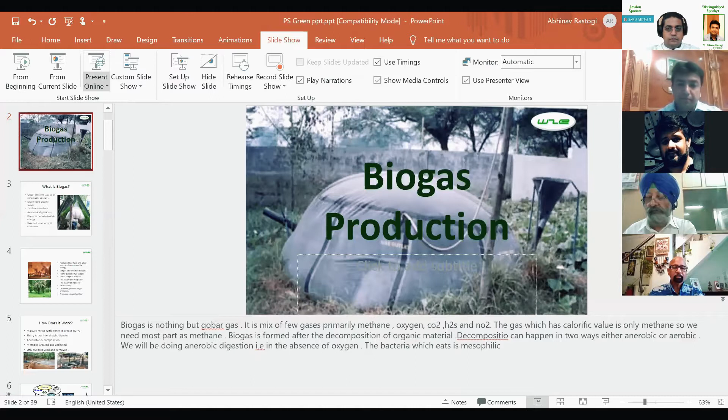First of all, I would like to tell you what exactly biogas is. Biogas is nothing but gobar gas, what we have heard earlier. We have seen in villages people use cow dung to make gas out of it and use it as fuel. So we will be doing this entire process in a much more commercial manner, and we'll be enriching the biogas so that we can make CNG out of it, and the biofertilizer out of it.

So biogas is nothing but a mixture of a few combustible gases like methane and oxygen, and it has a few inert gases like carbon dioxide and H2S, which are the unwanted gases. So we have to enrich the biogas to make it fit for industrial and vehicle use. There are two ways of decomposing organic waste: in the presence of oxygen, or in the absence of oxygen. We'll be primarily discussing the absence of oxygen, that is anaerobic digestion. The bacteria involved in this digestion are called mesophilic bacteria. This is a little technical, so let's discuss it later.

First of all, we'll discuss about the biogas production. Then after that, we'll discuss about the purification and the enrichment for industrial and vehicle use, so that we can use it as CNG for our vehicles.

What exactly is biogas? Biogas is nothing but when organic material decomposes. When it gets decomposed, it gives us a gas. Bacteria actually eat up the surface of the organic material and start burping, and that burp is nothing but the biogas which comes out of it. It itself is an exothermic reaction, and it is a clean, efficient source of renewable energy.

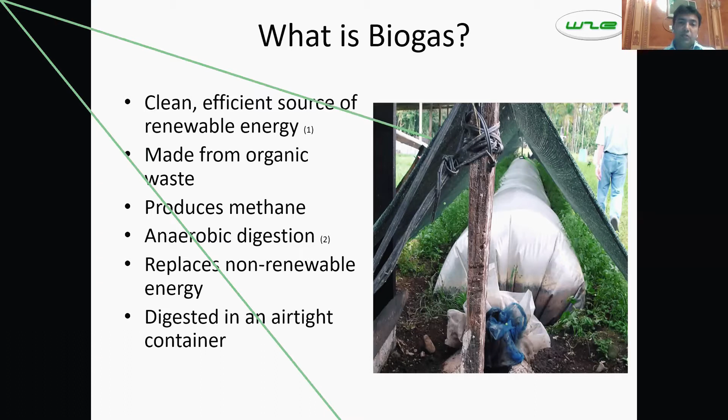Biogas replaces all the non-renewable energy resources like diesel and petrol. It is equally good as diesel, petrol, coal, or any other resource. As I told you earlier, the digestion has to be done in an airtight container. It replaces fossil fuels and other sources of non-renewable energy.

We have to move away from diesels, petrols, and coal so that we can have less emission of greenhouse gases. The greenhouse gas emissions when we burn CNG are far less compared to burning petrol, diesel, or LPG. It is simple and the cleanest gas available right now.

Carbon monoxide emission is given as only 0.09 grams per kg, which is really less. So it doesn't add up to greenhouse gases at all, and it is highly available in the core of the Earth as a natural gas. We have so much waste available around ourselves that we can collect it and make it into an energy resource.

Another byproduct we get out of this is biofertilizer. When these organic products are digested, there is a residue left which gives you purely organic manure, which helps enrich your soils, gives a better yield, cleaner vegetables, healthier soil, and doesn't let any pollution take place.

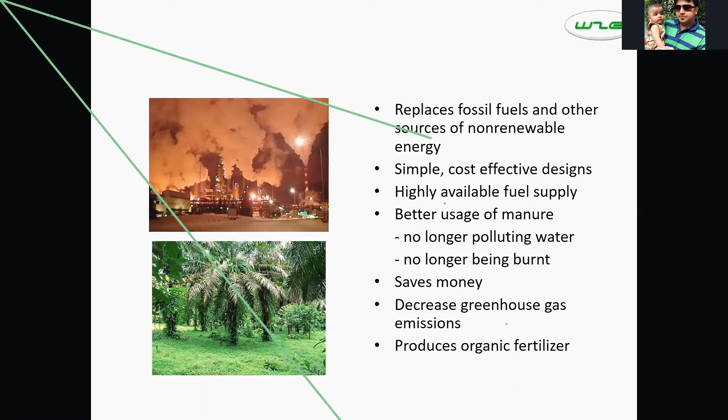We feed the feedstock, that is the organic material, into a feeding pit, and there are agitators in it. Those agitators will churn it and make it into a slurry mixed with water, and that is pushed into the airtight digesters, so that anaerobic decomposition of the material can take place inside. Inside the digesters there are already built up colonies of bacteria, the mesophilic bacteria, which help in the decomposition of those organic products.

Every organic product has a certain time for its decomposition, called hydraulic retention time, HRT. In our case, we'll be using press mud primarily, and cow dung as the organic feedstock. The HRT is around 40 days, so whatever goes in on the first day can be fully digested by the bacteria by the 40th day.

We have to design our digesters so that this process works well and we get maximum methane, maximum biogas out of it. We have to take care of a few important aspects. The pH value of the slurry going inside the digester has to be kept around 7, purely neutral. It may vary from 6.8 to 7.2, but it has to be kept in that range so it's the healthiest food for the bacteria inside.

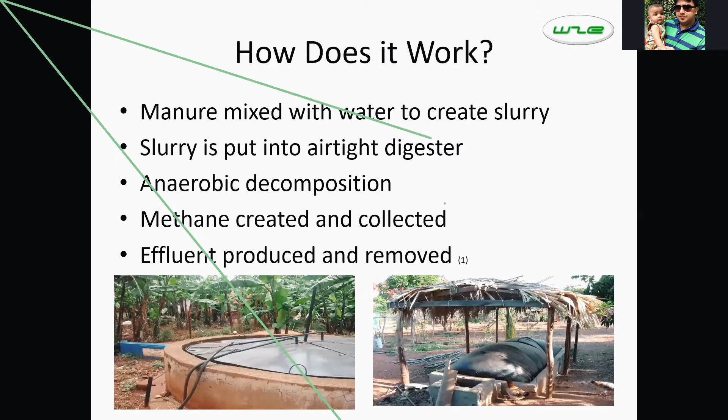So this is how the thing works. First, we put all the water, excreta, and slurry inside the digester, and anything biodegradable can be put inside a digester. It has a certain retention time, and we need to calculate how much time it takes to get digested.

Then comes the anaerobic environment, meaning the digester itself. It is covered from the top, a concrete cylinder basically, covered from the top, with a non-permeable membrane so that the gas collected at the top can be taken out through a pump or an exhaust.

The processes that take place in the anaerobic environment are hydrolysis - I won't go into detail, it's just the fragmentation of the organic material into smaller parts. Then fermentation takes place, then acetogenesis, dehydrogenization, and methanogenesis. Methanogenesis is the last part, in which methane is evolved from the bacteria.

Whatever the bacteria eats up, when it burps, the methane gets collected at the top of the chamber, and you have to keep churning the manure inside the digester so there is no scum formation on top. If there is scum formation, the bacteria won't be healthy and won't be able to eat properly, so it won't give you as much biogas. These considerations have to be taken care of.

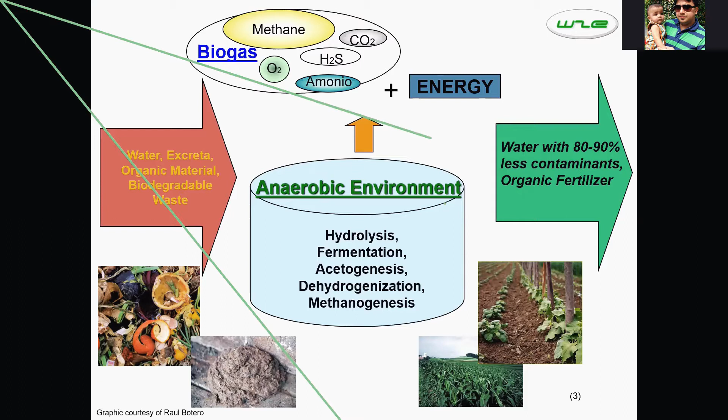The water which comes out of the slurry from the digester has 80 to 90% less pathogens in it, no harmful bacteria. These bacteria, whenever they come into the presence of oxygen, eventually die. So this has 80 to 90% less contaminants, and it is purely an organic fertilizer. So these are the technical requirements for a biodigester.

What exactly do we have to take care of? As I told you earlier, the pH value has to be maintained between 6.8 to 7.2 so that it is a healthier environment for the bacteria to survive, and so the bacteria can work more efficiently.

The temperature is also important, as these bacteria rely on a certain temperature. They are most active in a range of 35 to 38 degrees. So we have to maintain a temperature of 35 to 38 degrees inside the digester, and we do it by having coils inside, since it itself is an exothermic reaction. So the temperature is maintained a bit more, and we keep it insulated from the outside as well.

I told you about the time which has to be taken care of — that is nothing but the hydraulic retention time. Hydraulic retention time is the time needed for a material to get decomposed.

The waste to water ratio also has to be maintained — a certain amount of waste has to be mixed. The slurry cannot have a total solids (TS) of around 70%, making it too solid inside, so the bacteria can't eat it. So the TS has to be maintained at around 15 to 17% inside the digester when mixing the waste with water.

The manure, the slurry which comes out of the digester, is nothing but an organic fertilizer. So the organic fertilizer has a very good carbon to nitrogen ratio component. Your feeding stock should be such that it is neither too carbon rich nor too nitrogen rich — the carbon to nitrogen ratio has to be maintained.

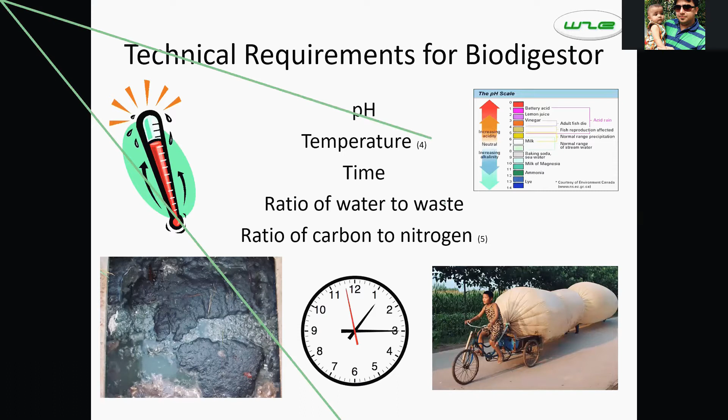Different products, when eaten by bacteria, give a different amount of biogas. The things eaten by the bacteria are nothing but biomass. So let's say if cow dung gives us around 100% of the gas, then food processing waste gives around 6 to 9 times higher biogas generated from the same amount of waste as cow dung.

But these wastes are not easily available for economic viability, so this has to be taken care of. We have to use wastes which are easily available in nature and abundantly available in nearby areas, so you can make some economics out of it.

We won't get too much food waste — I mean, we won't get tons of food waste daily unless we start collecting from all resources, which may not be economically or commercially viable.

But viable things are like collection of poultry waste, which is available on a daily basis, from the Gaushala waste or from the sugar industry, which runs probably like 7 months in a year. These wastes are abundantly available and have to be taken care of, as they make too much landfill. So this biomass should be considered appropriately so we can get a decent amount of biogas out of it.

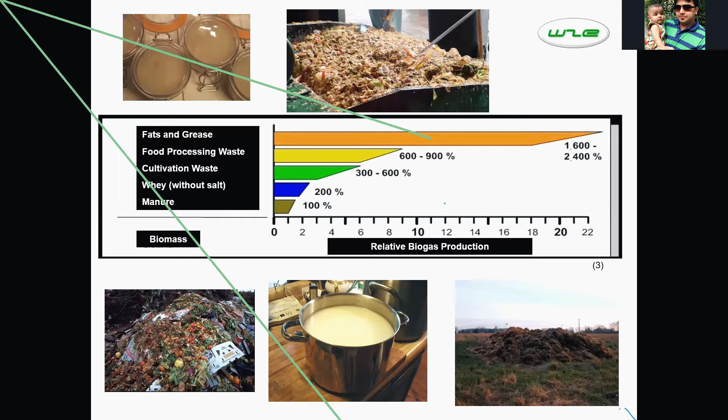Now we were talking about the effluent. The effluent which comes out of the digester is nothing but organic fertilizer — it is almost pathogen free, no harmful bacteria, no unwanted material in it. We can separate this effluent, the solid and liquid, in 3-4 ways, like sedimentation. But sedimentation is a process which can only take place for a smaller quantity of liquid.

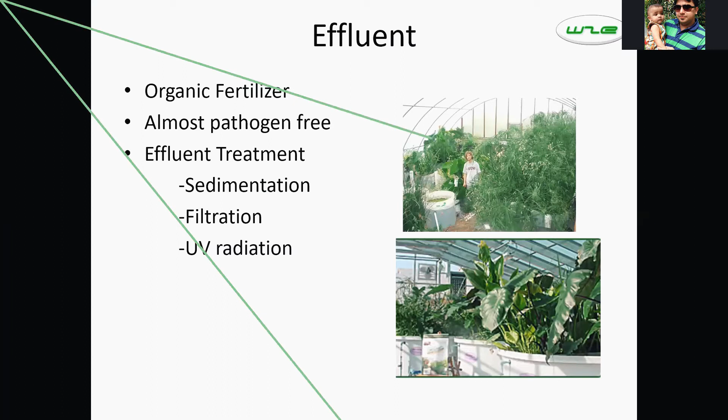If you talk about a lakh liters of liquid, the sedimentation is going to take too much time, and the amount of water collected daily will be too much. The filtration, but the other thing is passing it through the solid liquid separator, which we haven't mentioned here.

So now, is the biogas model successful? This is one of the first of its kind in the entire UP, and it got awarded by Mr. Yogi Adityanath last year. I've given a couple of presentations at the MNRE also, which is the Ministry of New and Renewable Energy Resources, and this project actually got approved from UP NEDA also. I gave a couple of presentations at UP NEDA as well. UP NEDA is nothing but a department of Uttar Pradesh which deals with additional resources of energy.

And this entire program comes under the SATAT scheme, run by the central government. SATAT is nothing but Sustainable Alternative Towards Affordable Transportation, which means because of the depleting nature of fossil fuel, we can have renewable energy instead. That is why the SATAT scheme came into play, starting around 2018.

So is this a successful model? See, gobar gas is nothing very new to the Indian industry. It's just that we haven't commercialized it properly. But this is a very popular industry in Germany and Sweden. It's been 25 years since it's been there, and they've been running trains on it, running all their trains, cars, and so many industries have been using CNG to run these things. So the Middle East has also been quite successful in doing all this.

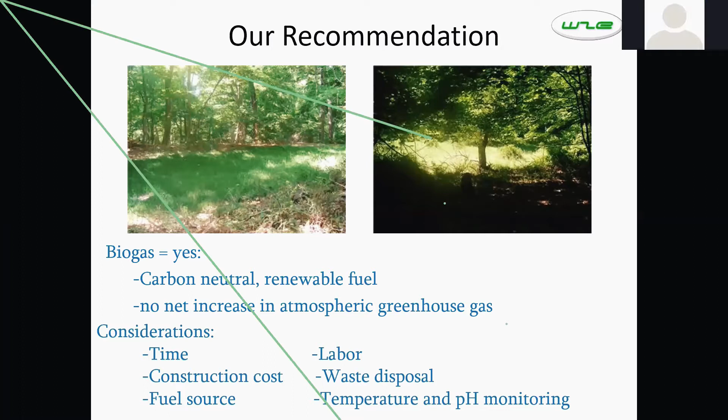Now we talk about the biogas enrichment process. Biogas is nothing but 55 to 75% methane, and the rest is CO2. There are traces of water vapor, traces of H2S. These things have to be eliminated before we can use it for vehicular and industrial uses, so that we can increase the calorific value, so you can run all your DGs, generator sets, boilers, cars, and other equipment which require a high calorific value. So we need to purify this biogas to get a better, methane-rich gas out of it.

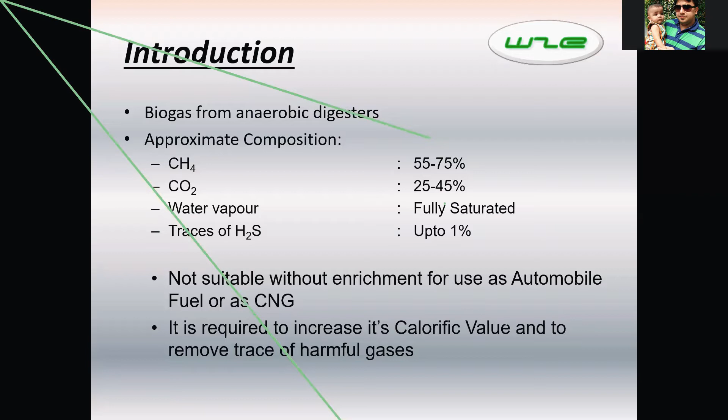So there are a few things to consider: how much a gas heater needs, how much a vehicle needs, how much a gas grid needs. We can give this gas to the gas grid also, or use it to run generator sets before purification is started. Before purification, the calorific value of biogas is around 20,000 kilojoules, and after purification is done, it becomes 50,000 kilojoules. So we need to enrich the biogas so we can have a better calorific value fuel out of it.

The purification is done through a few processes: absorption, that is scrubbing. In scrubbing, we use too much water, so there is too much water wastage. This is economical and very feasible, but the water is contaminated because H2S gets absorbed in it. So to dispose of that lakh liter, probably 2.5 lakh liters of water daily, if you use this method, it's going to be a troublesome problem.

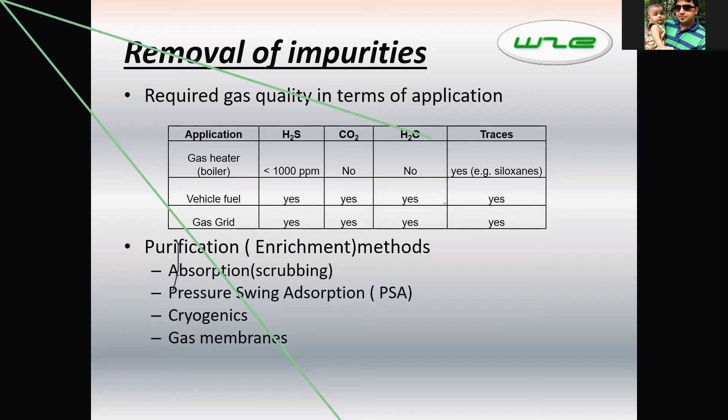The most commercially viable process is pressure swing adsorption, the PSA technique, which is nothing new, it's been around for ages. Cryogenics and gas membranes are other methods to remove impurities. But we use PSA because it's the most economical and the least harmful, and it doesn't lead to any kind of pollution.

First, we remove carbon dioxide, which is an inert gas and doesn't help in burning, so we can increase the calorific value of the gas. When you're burning a gas, it has to be consistent in nature. There are standards in the market, like for biogas or CNG, the methane content has to be around 96%, 2 to 3% could be carbon dioxide, and 1% traces could be oxygen, nitrogen, or water vapor.

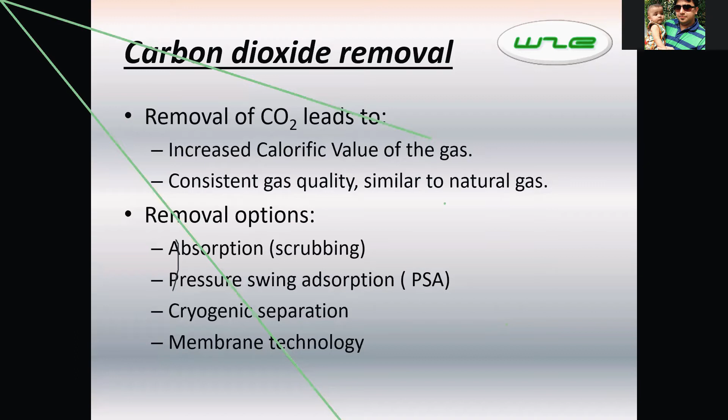This carbon dioxide can also be removed by pressure swing adsorption. As I told you earlier, water scrubbing technology passes the entire gas through a water chamber, which has to be changed again and again because at a certain pressure it absorbs the H2S and CO2, which become dissolved in water. So the disposal of that water becomes a problem, which is why we don't use this technique much. Also, the pressure, temperature, and pH of the water get disturbed, becoming more acidic because of the H2S involved.

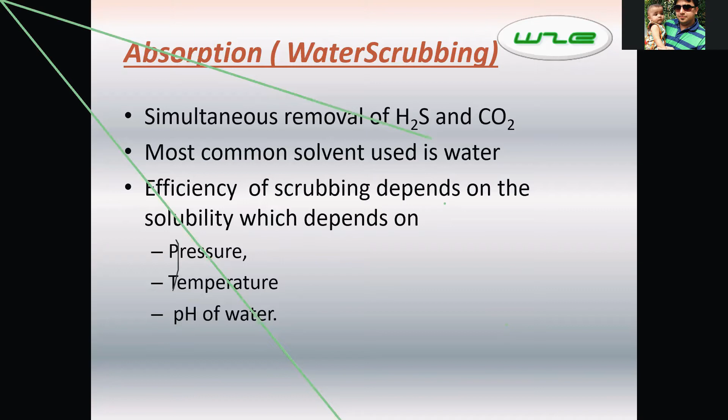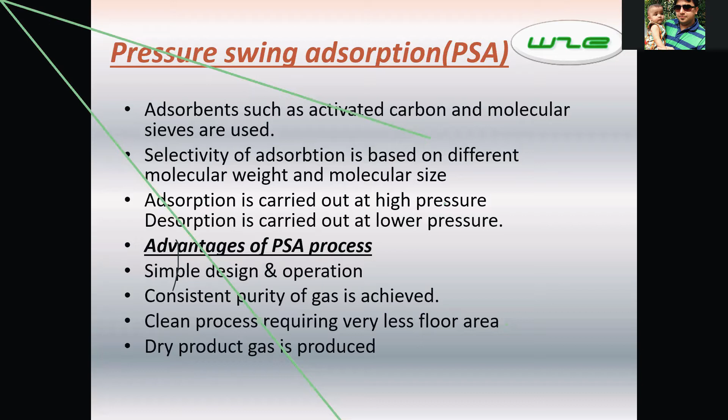Pressure swing adsorption is the process of adsorption and desorption carried out at higher and lower pressure. There are just two chambers: one where adsorption takes place, and one where desorption takes place. I won't go into detail, but these are simple designs to operate. I'll show in the next slides how exactly they look.

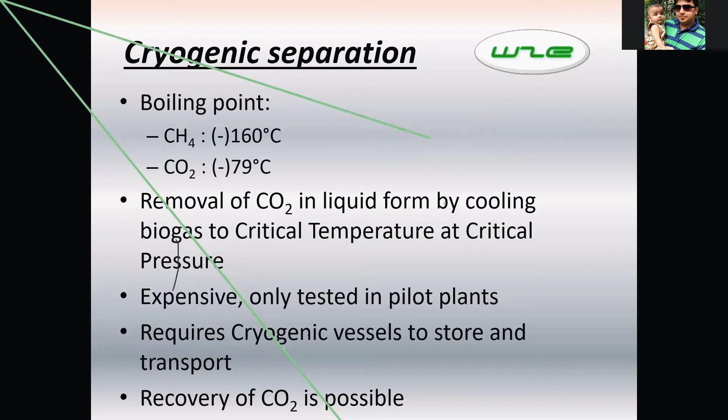We are not using cryogenic separation, so we won't get into it much. It's another process of removing CO2 by cooling the biogas, but the cooling itself takes too much energy, which is why we don't use cryogenic separation.

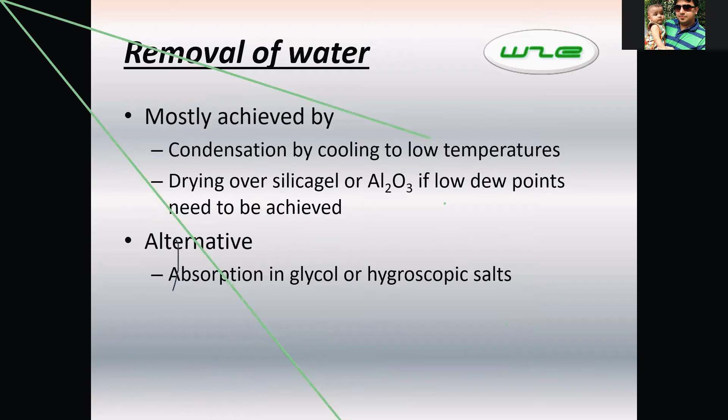It has to remove traces of water when the gases pass through the aluminum oxide, leaving behind all traces of water vapor, which is then removed.

The removal of H2S is very important. When the gases pass through activated carbon, it absorbs all the H2S involved. But there are still a few traces of H2S left after this process, so we remove those remaining traces in the next purification section.

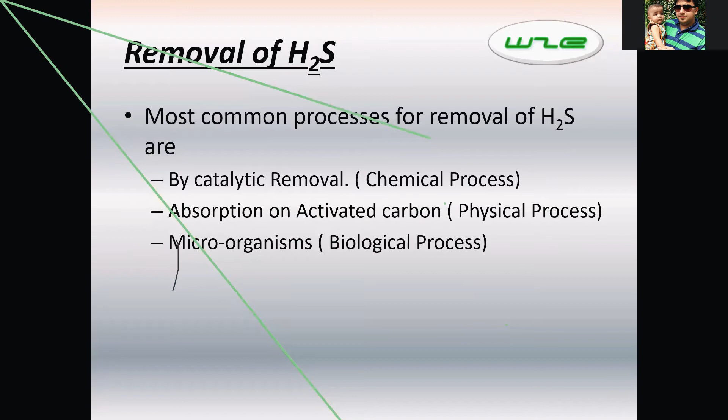This is nothing but adsorption through molecular sieves. Molecular sieves are small crystals with holes in them. When gases pass through, CO2, nitrogen, H2S, and water molecules get trapped, since the sieve sizes correspond to the molecular sizes of carbon dioxide, nitrogen, and H2S. This is a bit technical.

This adsorption and desorption process generally takes place under depressurizing conditions—one with pressure and one without. The PSA systems produce purified, methane-enriched gas continuously by repeating this adsorption and regeneration process.

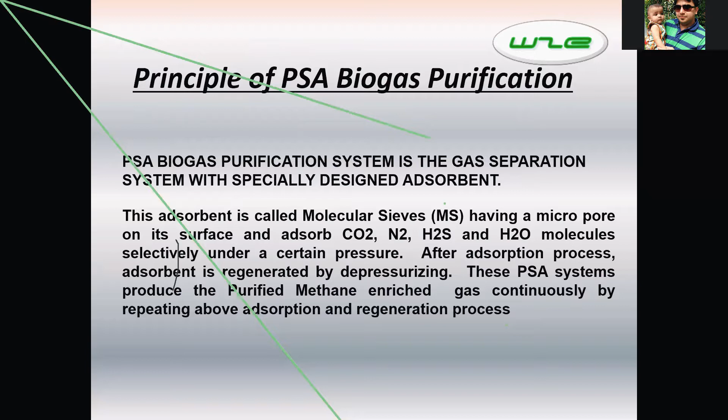This is how a PSA system, the purification system, looks like. On the left, the biogas goes in.

The coarse removal of H2S: as the gases pass through the activated carbon, 90% of the H2S is removed before it enters the chambers of the PSA system.

After the pressure swing adsorption is done, we get CO2 on one end. We can actually trap the CO2 also for making carbonated drinks, but we generally don't do that. We'll be flaring the carbon dioxide into the air and just collecting the methane out of it.

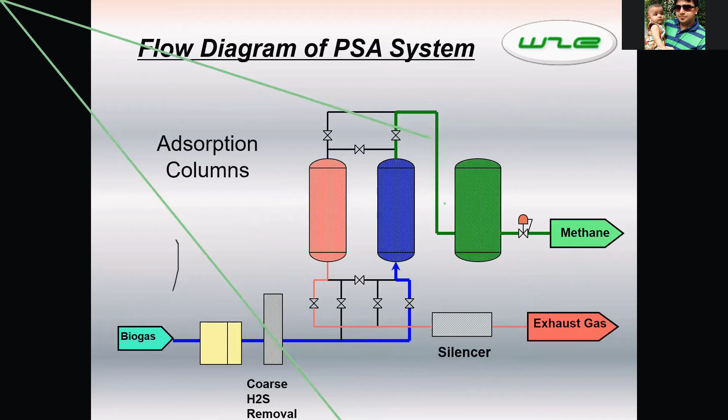The difference between LPG and CNG is primarily that LPG can only be compressed to a pressure of around 7.5 bar, which is not much, so you cannot transport the gas to a longer distance. The first advantage of CNG over LPG is it can be transported to longer distances because you can compress it to around 250 bars, and it is lighter than air.

CNG is lighter than air, so whenever there is a leakage, it can flare up into the air and the explosion risk is bare minimum. But LPG is heavier than air, it's denser, it settles at the bottom of the surface, so in case of an explosion, it's a big boom.

So these are a few advantages of CNG over LPG: first is the distance it can travel, because you can compress it to be transported over large distances, and it is lighter than air.

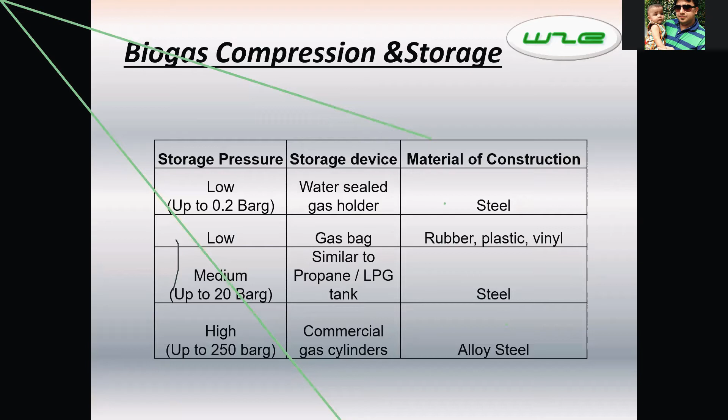At the last part of the slide, you can see you can compress the CNG at around 250 bar and it can be stored. You would have seen those cylinders at the CNG station kept at the rooftop - those are the cylinders where the CNG is actually filled up.

The biogas is purified and used for various applications, replacing fossil fuels including vehicular fuels. As discussed earlier, purification is required for transportation, storage, and vehicular use. When you compress a gas to 250 bar, the volume decreases by 250 times, so you can store it in a cylinder and carry it to a longer distance, making it more commercially viable for transport.

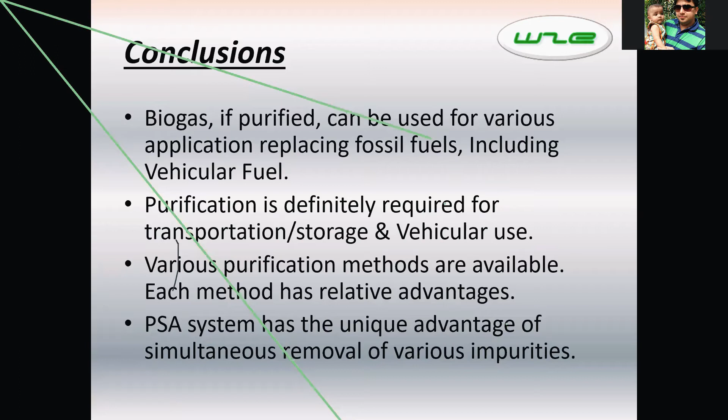Various purification methods have been discussed, and primarily we use the PSA technique. PSA systems have a unique advantage of simultaneous removal of various impurities. I'll show you a few projects in different parts of the country which are on a smaller scale but are still producing gas.

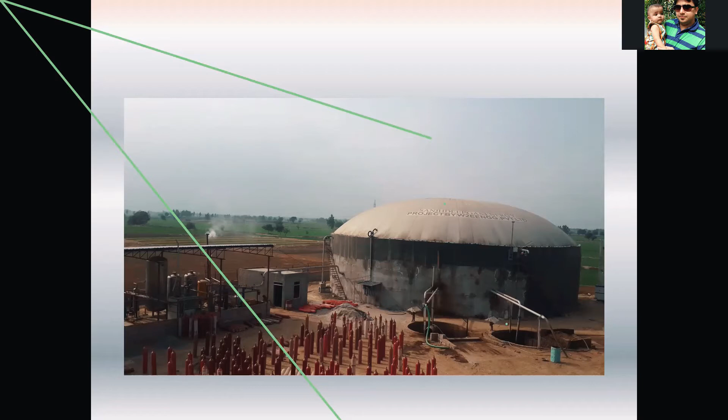On the left hand side you can see a purification unit, and this is how a small digester looks like. There are two small feeding pits, with two pipes going inside those pits.

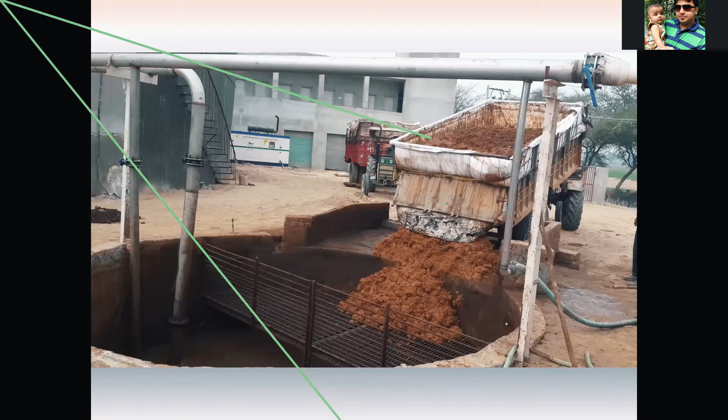This is how the feeding looks like - it's a big concrete feeding pit where you dump all the organic material and mix it with water. With the help of these pipelines, because there is so much pressure inside the digester, compressors push the slurry from this pit inside the digester.